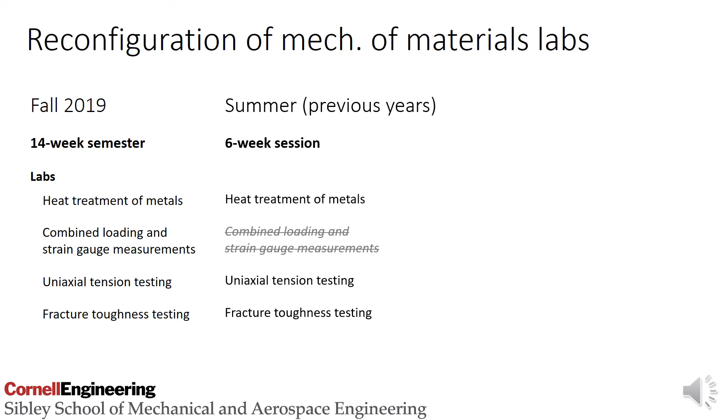Our regular Mechanics of Materials course in the MAE department at Cornell is a 14-week course with approximately 35 total lecture hours and 4 in-person labs. We've also been offering it as an accelerated summer course with about 30 total lecture hours and 3 in-person labs spread over 6 weeks. This summer, we got approval to continue offering the course for lab credit by redesigning the lab experience for remote learning.

We designed 3 lab activities in a scaffolded sequence, working towards more autonomy and higher expectations as the course progresses. In addition, some learning goals of the original fracture toughness lab will be addressed through a simple in-class activity with data collection, but no lab report component.

The new ABET assessment scheme requires us to establish performance indicators for students' ability to design experiments, so we had already been making plans to shift away from traditional recipe-based lab activities. I believe the scaffolded sequence, together with the challenge of doing precision experiments without expensive equipment, are helping us to achieve learning goals that we weren't able to achieve with our traditional labs.

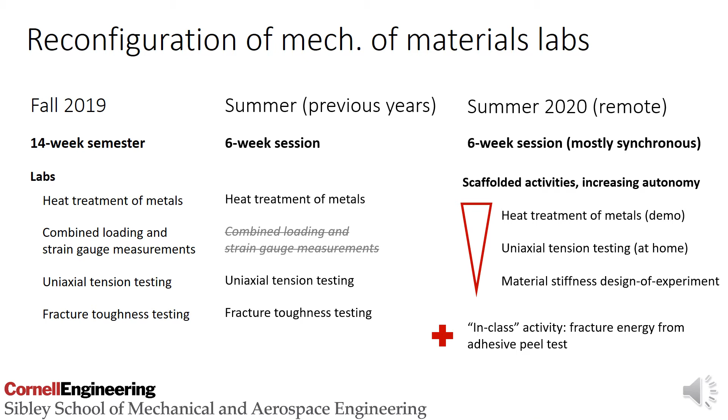Our hands-on labs require material kits which were mailed to students during the first week of class. I have 2 students overseas, so we didn't expect their materials to arrive in time for the first lab. So the first lab is a video demonstration and data analysis activity about heat treatments of aluminum and steel. Students watch a few pre-recorded videos showing the lab procedure with voiceover narration and then perform analysis on pre-collected data.

I took advantage of the modules layout in Canvas, our course management system, to guide students through an introduction and an auto-graded pre-lab quiz so that they could show up to the virtual discussion and Q&A session prepared.

The primary goal of this lab is to establish standards for what a good lab report looks like and give students feedback on their presentation of data. A lab report template was provided with a mostly written procedure. Students had to complete the procedure and then write the intro, analysis, and conclusion sections.

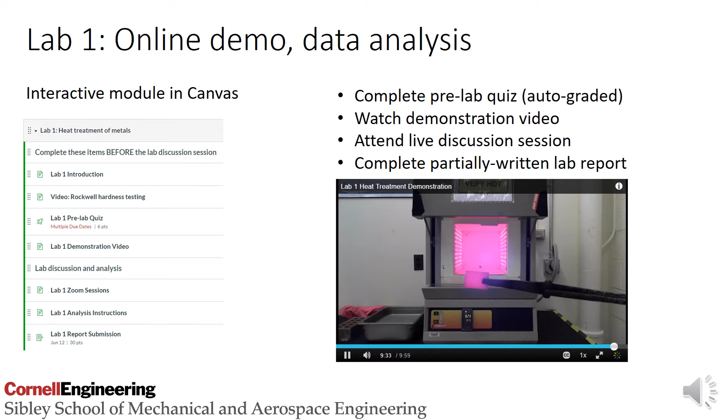In the next lab activity, students will set up and perform a load-controlled tension test and a constant load creep test on a nylon filament. The students first learn about the difference between load control and displacement control and see why displacement control is more difficult to achieve at home.

The kit includes the nylon sample and a few basic supplies like S-hooks, picture-hanging nails, and a cheap spring scale, but students need to supplement these materials with items from around the house in order to perform the experiment. Rough directions are included for performing the experiment, but the students have to write their own detailed procedure.

In my example, I suspended the filament from a stiff door frame and used a curtain rod lever to amplify the measured displacements. There are many ways to apply and remove the known loads. For example, I used a measuring cup to add rough amounts of rice to a load bucket while measuring the mass of the remaining rice on a kitchen scale.

A student who beta tested the experiment for me pre-assembled 50-gram bags of beans that could be easily pierced and hung from a hook. In this way, the students are given a little bit more autonomy over the details of the experiment, and they have to write a detailed procedure in the lab report.

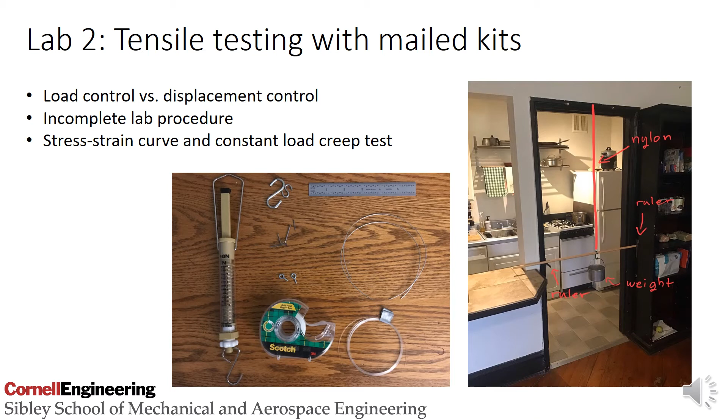The nylon fishing line is cheap, easy to work with, and flexible enough to produce easily measurable displacements over a gauge length of about 1 meter. The simple home experiment gives an approximate modulus that can be compared with literature values. Furthermore, fishing line could be purchased from hardware stores, which were still open even under the state of New York lockdown order.

Although everyone performed nominally the same experiment, there was considerable variety in methods for measuring and applying the fixed loads. For example, here's one student's solution using pre-made bags of dry bulk foods.

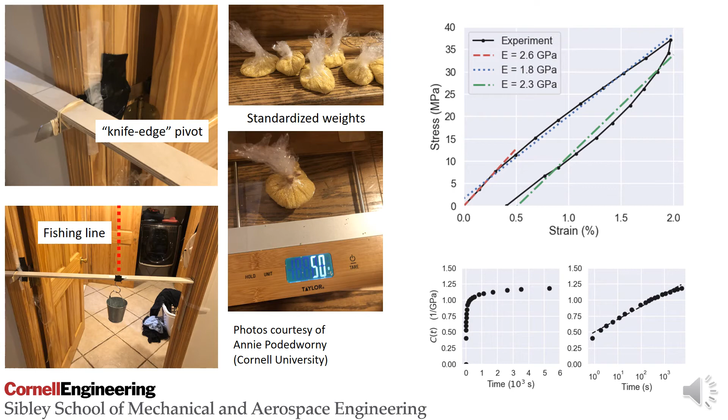The creep experiment is essential for students to be able to analyze and interpret their stress-strain curves. Many students discovered during the first experiment that their measured stiffness depended on the rate at which they performed the test, and they correctly predicted the trend for faster or slower loading rates after completing the creep test.

In the third lab activity, students design and conduct their own experiment to measure the Young's modulus of a steel wire. The 19-gauge wire is much too stiff to test in tension, but the students spend the first weeks of class learning to use Castigliano's theorem to find stiffness of structures. The students are allowed to plastically deform the wire into a shape more amenable to testing. Some possible examples are shown here on the left.

Students also have a variety of options for how to measure the stiffness, either by measuring the deflection under a known load or by measuring the resonant frequency with a known mass. Two student experiments based on coiled geometries are shown here on the right.

Students design every part of the procedure, including designing the fixture and measurement method, estimating the maximum load they could apply based on the failure criteria they learned in class, and estimating the measurement uncertainty. This experiment involves the greatest level of autonomy. The students submitted a rough experiment proposal and then received feedback from me and the teaching assistant before refining and conducting their experiments, so we continued to provide support even as the activity became more open-ended.

Students came up with a lot of solutions based on cantilever beam bending, coil spring extension, etc. One group even measured the frequency of a torsional pendulum hanging from the straight wire rather than measure the stiffness directly at all.

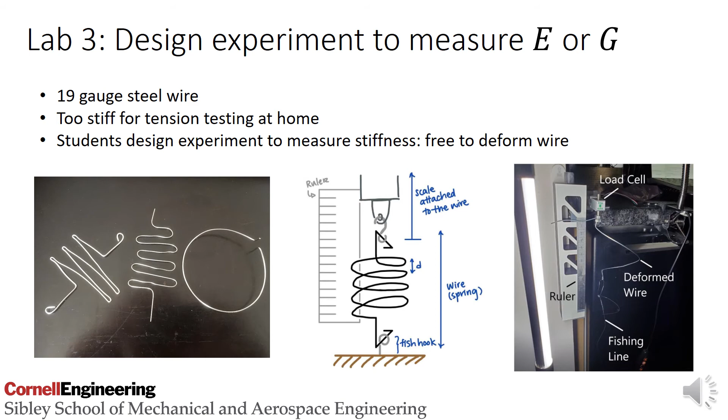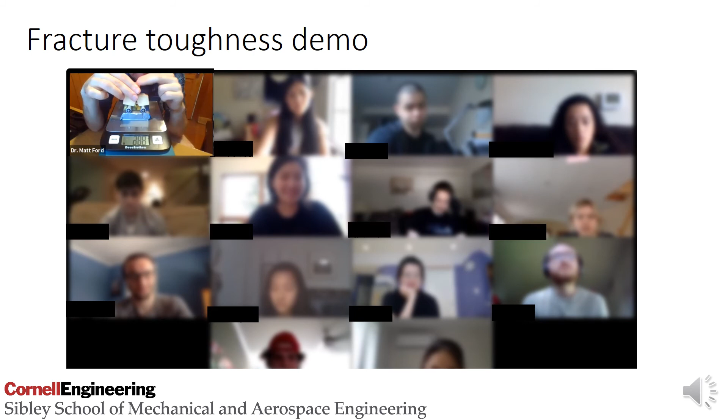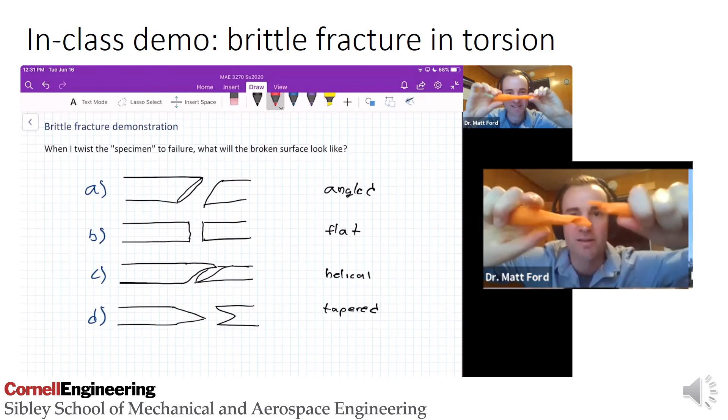So for example, I required my students to discuss the specimen geometry and the reasons behind it, the measurements taken during the test and the properties calculated from them, and some of the requirements a test must meet to be deemed valid. But I otherwise encourage you to leave the assignment open for students to explore their own creative ideas.